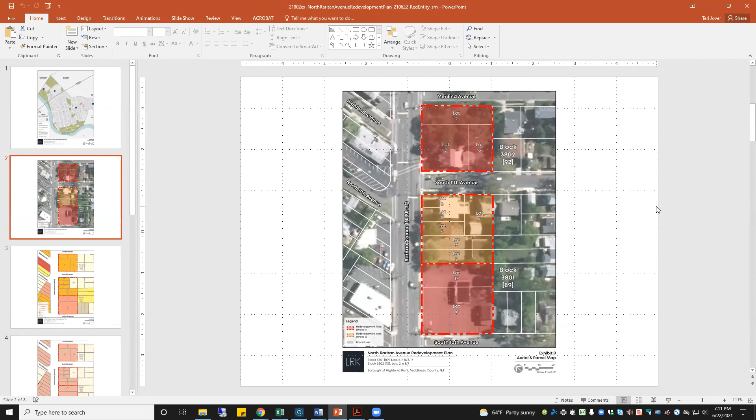If we go forward one, we can look at the existing zoning. These properties exist within the C commercial zone, with the exception of what I would refer to as the intervening parcels. There's one on South 11th that's in single family zoning, and this was identified as an issue to be resolved as we move forward in the master plan.

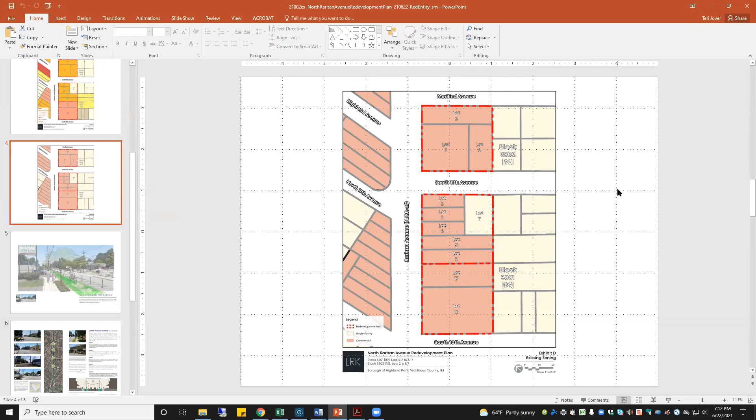If we go forward to the next slide, we actually show the master plan. The vision here was really to try to transform outdated commercial corridors into safer, more attractive and livable, complete streets by enriching the mix of uses, enhancing the gateway and the sense of arrival, because this is the corridor that comes downtown.

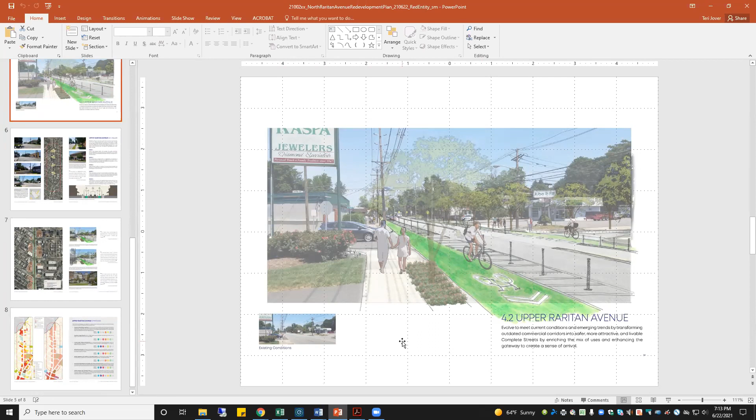What you see illustrated here, the existing condition shown in the small image in the lower left of this page, is basically a sketch overlaying the streetscape and the road diet that's been discussed with NJDOT, identified in the PED bike plan, that would reduce this stretch of Upper Raritan into two lanes, put in ped and bike accommodations, and make it a safer, slower, more livable street.

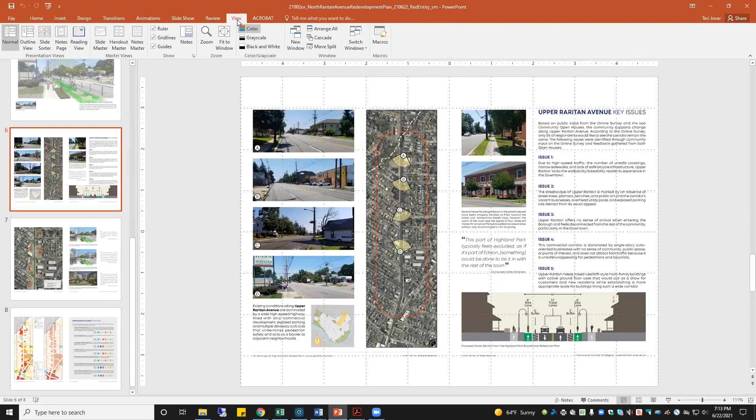If we go forward to the next slide, there's an image in the bottom right from the PED bike plan that was incorporated, but there's a whole bunch of issues identified out in this corridor that I think everyone who knows this part of town understands. There's challenges, it's high speed, pedestrians aren't accommodated, there's no bicycle accommodation, it's unsafe. The neighborhoods really don't come out and embrace the corridor because of the high speed traffic that's there today.

And so there's a great quote here. It says, this came from our outreach, from our public workshops or the survey we did for the master plan: this part of Highland Park typically feels excluded, as if it's part of Edison, and that something should be done to tie it into the rest of town.

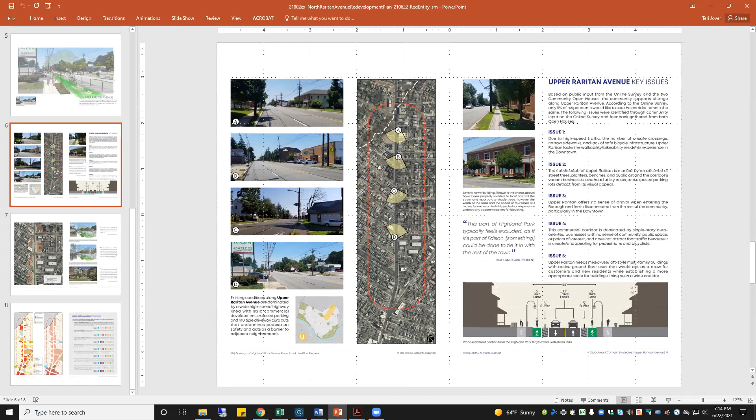So if we go forward to the next page, we actually identified these sites that you can see in brown. The two that are largest, on the upper right, were identified as potential redevelopment and infill sites.

So again, this is an opportunity to put the master plan into action. The master plan wasn't trying to be comprehensive and specific about every possible site, but it was basically a snapshot through just these few blocks of the corridor, showing that on both sides of the street there's lots of opportunity for improvement.

And in fact, if you look at the images on the right side, you see that first sketch we showed you in the top right with the bike lane, but the image in the middle shows a 3.5 story building, sort of mixed use on the ground floor, upper level loft style apartments to frame the street and redevelop.

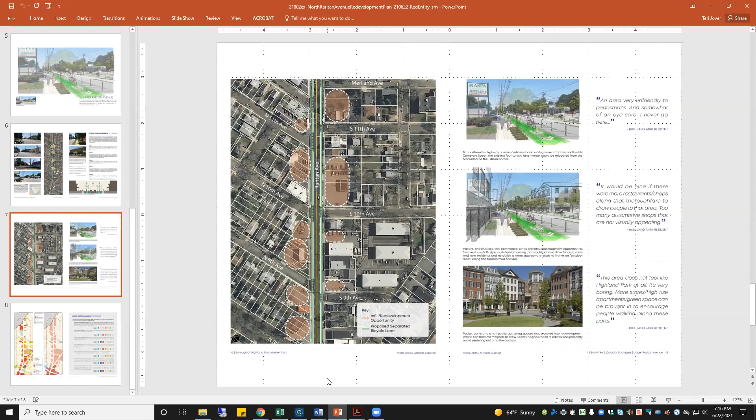In fact, one of the sites we're talking about right here was illustrated right there in the master plan. And that bottom image is just the whole notion that we want to try to create some semblance of public space, even if it's small, along this corridor as we transform some of these sites into a place that would make it inviting and safe for residents who live on both sides of the street.

to come out and basically reclaim this stretch of highway back as a livable street that's a gateway into downtown. And the last slide on the bottom illustrates the strategies we outlined for this in the master plan, which included transforming this into a gateway, also custom tailoring infill and redevelopment using the redevelopment plan tools. So that's what we're talking about doing here, along with a whole series of other strategies, a lot of which we can touch on.

And again, there's an example on the left of both the existing zoning and the existing land use. You can see on that long image in the center, the pink area is the commercial zoning that exists up and down the corridor. One of the things we identified in the master plan is the fact that it's not consistent. It's at different depths, the lots change. So it's a real challenge there. It's difficult to have existing zoning that really works effectively.

And I think this is hopefully the first of several sites that will come forward to potentially transform, using the guidance that's in the master plan, which would be what we would recommend be used in a redevelopment plan for this area.

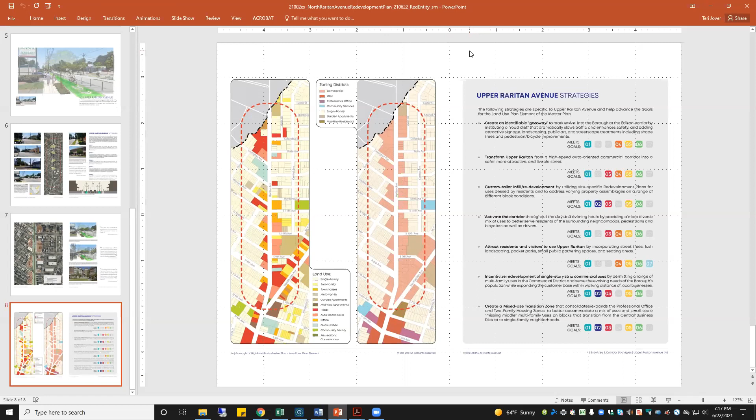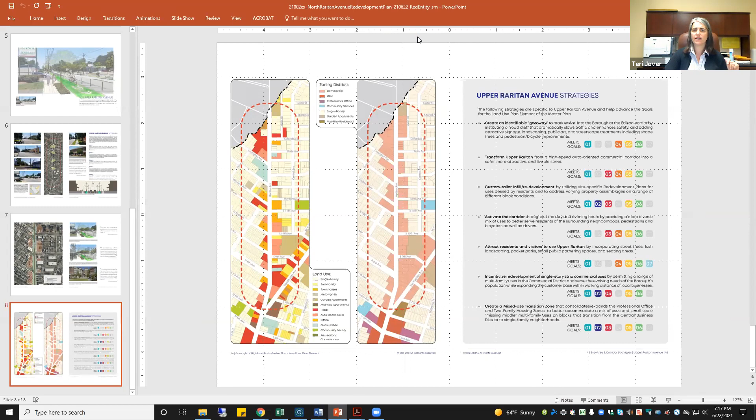We would want to ask Jim to go back to his team and pull together a proposal for a redevelopment plan for the areas we just outlined that council could review. And hopefully, if we think it's a good proposal, we can go ahead and authorize it at a future meeting.

Okay, so is that generally— does anybody have any questions for Teri or Matt or Jim? Or Joe? Yeah, I just have a quick question. Are those parcels all in a redevelopment area or are they in the rehab area?

They're in the rehab area. So should we be thinking about putting them in the redevelopment area? Do we need to, if we can adopt the plan under the rehab statute, was the assumption we were operating under? Don't need any other tools? Can't hear you, Joe. It depends on what other tools we need. I mean, is there going to be a need for any other tools, a PILOT? That hasn't been our discussion, that hasn't been part of the discussions at this point, so—okay.

Anybody else? Okay, all right, so you'll hear more from us on this. Jim, you've got the green light to at least pull together a proposal for our review. All right, thank you.

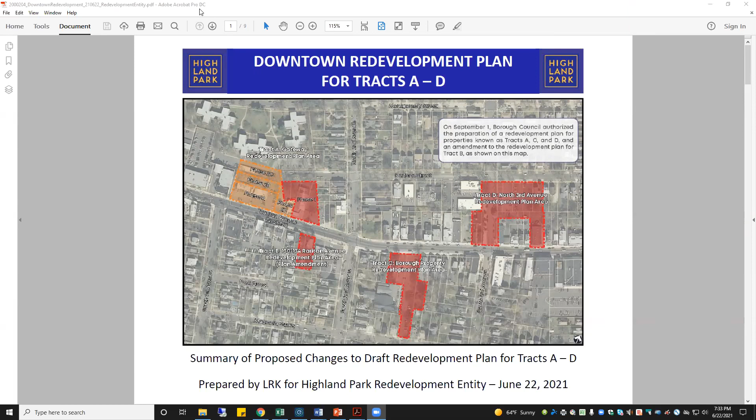If we can go forward one, Terry—I think one of the things I wanted to mention as we look at the four tracts you can see from this aerial view looking up Raritan Avenue, is we did emphasize in some of the discussion at the planning board that there's existing zoning, CBD zoning, PO zoning on a portion of Tract D that today permits, as of right, four-story buildings under existing zoning. There's structured parking that appears to be permitted as well in the downtown. The ordinance could use some clarification on that, but there are provisions for parking structures and design standards for those as well.

The other thing we don't have control over under the existing zoning, for instance, would be a potential individual property owner within these tracts who has no other access from a side street or rear street, proposing new curb cuts along Raritan Avenue—something the 2003 master plan identified as a safety concern, and identified as a problem in the 2005 redevelopment plan if that's not used, but we can't preclude someone from gaining access. So there are things that can happen under the existing zoning that perhaps could have outcomes people don't realize.

If we could go to the next slide, I'd like to go over the proposed changes to the April 13th draft, the last one we had placed out there and referred to the planning board. The first, and most significant one, which drew a lot of public comment and community discussion, is that the revisions will now eliminate the permanent street closure on North 3rd Avenue. So no Festival Street, no restriction in terms of vehicular movement, and a potential proposed parking structure on Tract D—which we'll show you in a moment—could have access from North 3rd, both directions.

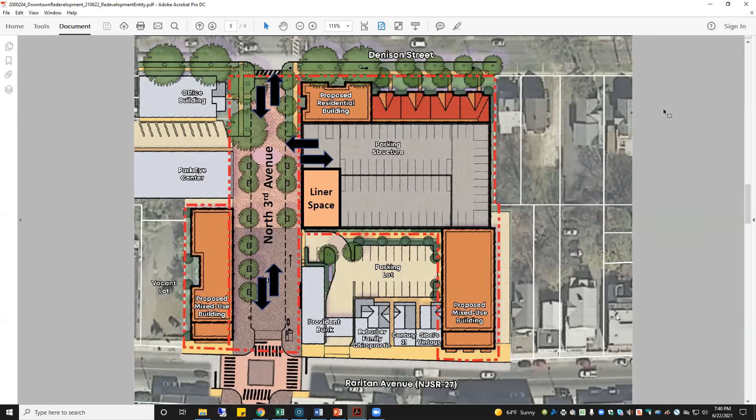It is effectively parking primarily for the residential, mixed-use development on all of the tracts, which are all located well within a 5-minute walk of this site where the garage is shown. So there you can see all of the tracts. The garage is again primarily related to facilitating mixed-use redevelopment and primarily to accommodate potential residents of those upper floor apartments.

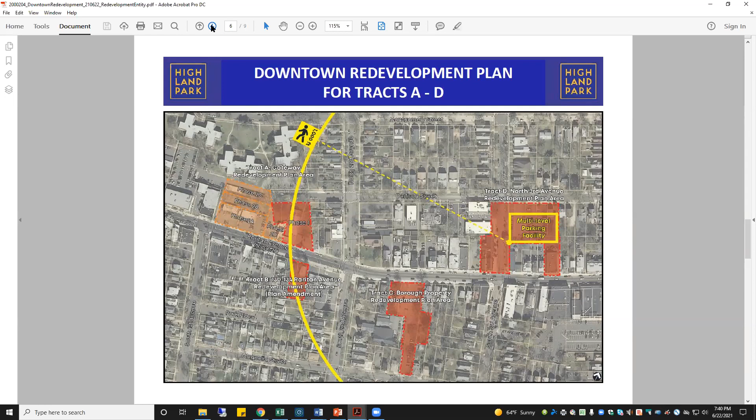I just wanted to go over the final set of changes on Tract C, which is the site of the existing farmers market. We are now requiring a public plaza/green gathering space along Raritan Avenue and permitting multiple buildings. The prior draft had referred to having one courtyard building and a small plaza, so that's been expanded in terms of what it's intended to achieve.

We've also clarified that the redevelopment plan supersedes the existing land development ordinance. I had mentioned that back in April when we first looked at this—it said it in one section, now it says it in both of the pertinent sections. It incorporates provisions of the 2019 pedestrian and bicycle plan, which was a recommendation from the planning board to boost it up. I'll go over those in a second. Lastly, there's a whole variety of miscellaneous minor corrections, edits, and revisions that have been made, nothing substantive.

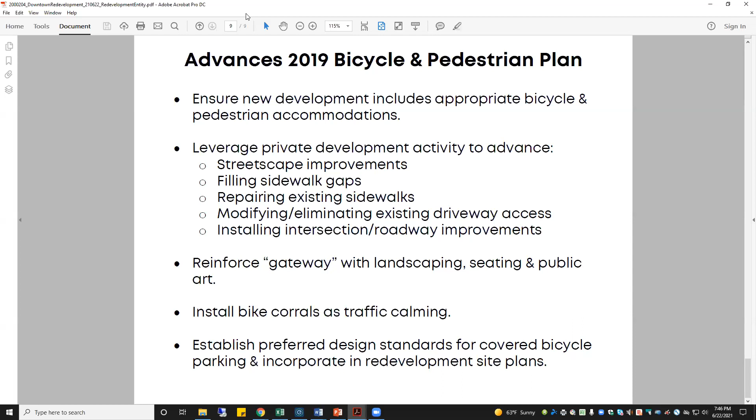Okay. Thank you, Terry. Any questions from council members on what you just saw?

Comments, council members? Matt Hirsch? Hey, just back to the parking again in the garage.

I think I only realized fairly recently that this was a completely private structure suited for what's proposed in the master plan. I'm just wondering if there's any opportunity for any element of public parking, if that's something we're considering.

Jim? Constantine? Sure, I thought Joe was going to say something.

We've indicated we think the ground floor could have that, and the example I've referenced previously is a redevelopment project that's received full approval and is moving forward with full borough support in Hightstown, that both Mr. Bauman and our firm have worked on. That parking structure, part of 400 downtown residences in a renovated rug mill and some new structures, includes a limited number of ground floor spaces because they're the most easily accessible to the public that can be used to support the downtown business district.